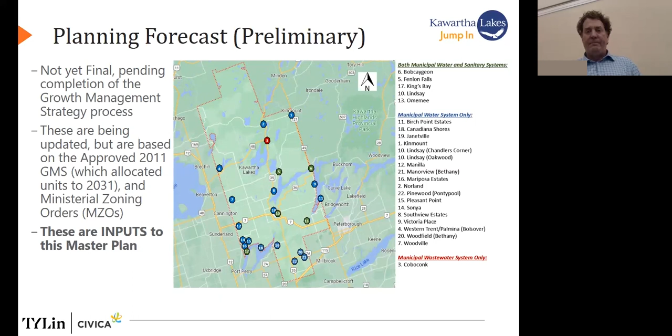I touched on the notion of maintaining the level of service, which is the standard at which the city wants to operate their systems. Development is going to lead to increased water demands and increase the flow into the sanitary sewer systems. That may ultimately lead to us exceeding the capacity of the water treatment plants or wastewater treatment plants, and it may also lead to exceeding the capacity of individual pipes or pumping stations. The objective of this master plan is to study the impacts of that growth and identify required solutions to maintain the level of service.

We don't want development in one part of town to result in low pressures in another part of town. To that end, for water treatment plants, we want to ensure the water supply needs can be provided. Typically you start planning your treatment plant upgrades when the actual demands through the plant reach 80% of the capacity of that plant. Once you start hitting 80% consistently, you need to start looking forward and planning for growth.

System pressures: the city tries to deliver pressure to all residents and businesses between 350 and 550 kPa, or 50 to 80 psi. That's the range we want to try and keep everybody in. When growth occurs, your house could be at 75 now, and if it drops to 55, you're still in the range, but that's still a pretty significant drop. We're going to try to ensure there aren't major changes in the level of servicing.

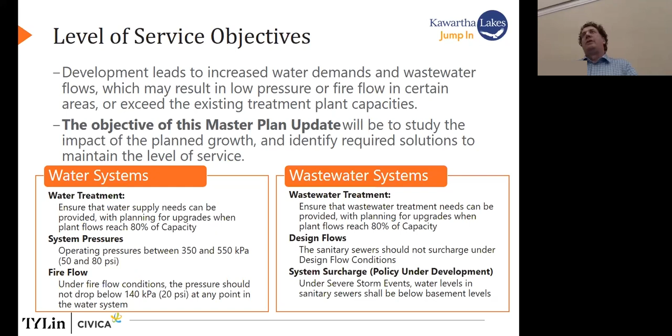So that's the objective - I'm not expecting people to read this slide. This is the Municipal Engineers Association class environmental assessment process. Anytime public funds are spent on upgrading public infrastructure, we have to go through this process to ensure we've consulted, analyzed a whole bunch of alternative solutions, and factored in the natural environment, the socio-cultural environment, the financial aspects of projects and the like. It's a detailed and transparent process. At the end, we'll document all the steps we've taken and the results of the analysis, and share it in a publicly accessible project file report at the end of this process.

We're not at the end of this process right now.

We're actually in the early stages of it. We're approaching the end of phase one, where we're identifying the problem statement. We're going to collect feedback from interested stakeholders, and then do a more detailed dive into the infrastructure needs to support the full build out of the neighborhoods and communities, and come up with solutions that, at the end of the day, when we present the alternative solutions, ideally anybody from the public who picks up the document and flips through it should understand the basis for why we came up with those solutions. In a perfect world, they'll say, you know what, based on the alternatives that were available, it does seem like the most reasonable approach.

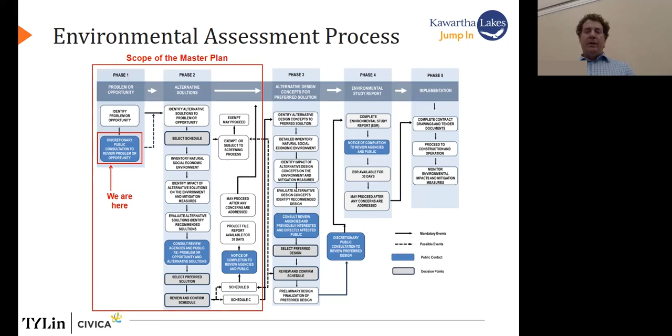Now I'm going to get into a couple of slides that indicate the sorts of impacts that the growth pressures we anticipate, based on the current status of the GMS, may have. Again, it's not 100% finalized, but looking at these numbers gives us an idea as to which systems may become stressed by the growth. I don't want you to focus too much on the numbers. Of course, if I didn't want you to focus on the numbers, why'd I put them up?

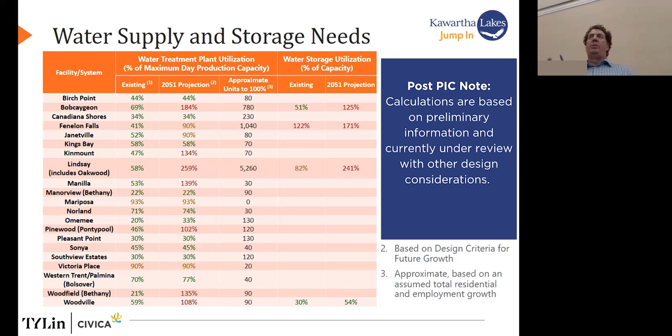But these numbers are not yet final. These numbers assume, okay, so two things. I'm going to go through this column by column. Obviously we've got all the facilities—this is water supply and storage, so water systems only. On the left we've got all of the various facilities, all the various systems owned and operated by the City of Kawartha Lakes.

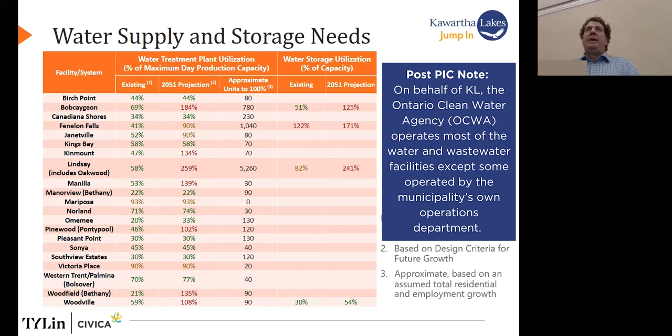The existing column is what percentage of the maximum day water treatment capacity is being used today, based on the last 5 years of data. So if we just pick Fenelon Falls, for example, it currently is operating at about 41% of the plant's rated capacity. That's what the Ministry of Environment, Conservation and Parks has approved that facility to be able to handle.

That's what it was designed to be able to handle. It's entirely possible that there may be some processes that have aged and you maybe can't get the full capacity of the facility through it. There could be some hydraulic bottlenecks that have developed over the years. This doesn't factor that in—this factors in the approved operational capacity of the facility.

So Fenelon Falls, based on the existing community, the existing service area, is running at about 41%. When we add in all the growth that's anticipated or forecasted for Fenelon Falls at this time, it will take us to about 90% capacity by 2051. That puts us above that 80% threshold that I talked about earlier. So the city really needs to start thinking about upgrades to that facility, but it's not at 100% capacity.

The other note, note number 2, is it's based on the design criteria for future growth. So there's a design criteria, which is how much water you assume every resident uses, or that every square meter of employment land uses. Those numbers are generally conservative, and if we look at historical usage, they're generally lower than the design criteria. So as growth continues, that growth will probably end up using a real amount of water that is lower than the design criteria amount.

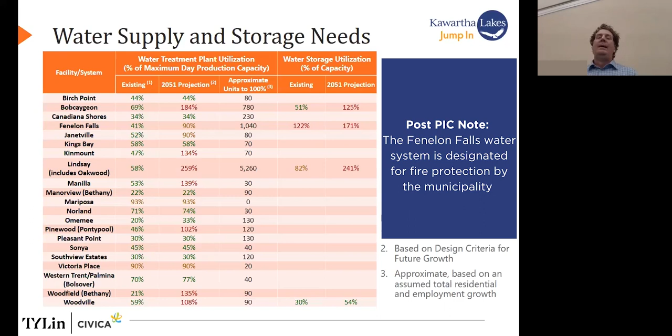So anyway, the point is that we're going to continue to look at these numbers and establish if and when upgrades are going to be needed. So the main takeaway here: upgrades to some water treatment plants and storage facilities will need to be considered in order to support the planned growth to 2051.

If a facility is projected to be, say, 5% over its design capacity, maybe it isn't warranted to upgrade the facility. These are the sorts of things we need to consider.

There's a number of alternatives we're going to look at. One of them is do nothing, understanding there's a risk the facility won't have enough capacity to produce the water. But knowing the design criteria, maybe the city accepts that risk. Maybe you limit community growth. So instead of 1,000 units of forecasted growth, which would push us 5% over and trigger a $5 million upgrade - I'm just making numbers up - maybe it makes more sense to cap growth 20 units short of what's anticipated, and avoid a $5 million capital investment in the plant.

These are the sorts of things we're going to be evaluating and discussing, and then we're going to bring back to you at the next Public Information Centre.

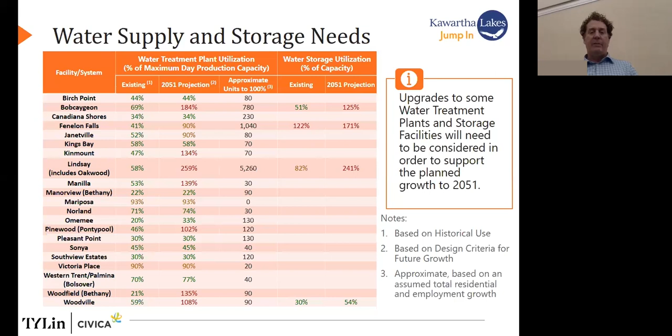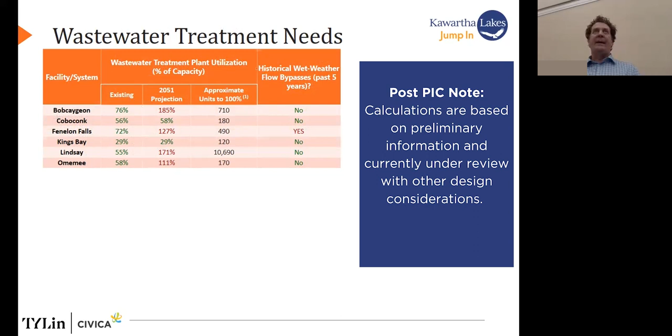We've done a similar analysis for the wastewater treatment needs. Same idea as before: what are the existing flows to the treatment plants relative to the plant's capacity? And if we allow the growth to occur, if we connect everybody, if all of the growth planned for these communities connects to the treatment facilities, that's what it'll come to.

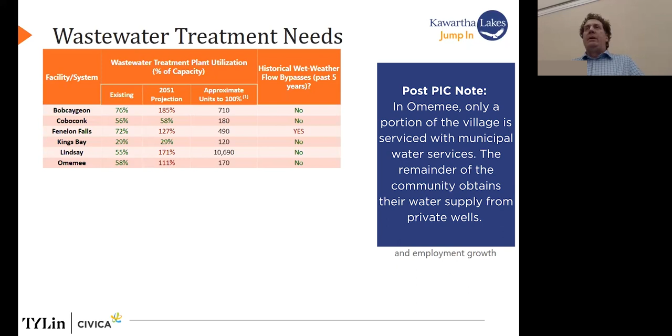Sorry, one important point I missed on the last slide. Growth within urban centers - and for Kawartha Lakes that's Lindsay, Bobcaygeon, Fenelon Falls, and Omemee - is supposed to be serviced by both municipal water and municipal sewers. In the hamlet areas, which cover the other systems, you've got the potential to have municipal sewer servicing but be serviced by private wells, or vice versa.

So when we talk about the growth that could occur in some of these communities, these numbers present what would result at the existing treatment plants if all of that planned growth ends up connecting to the networks. They may not have to all connect. So when we come back at the next PIC, you may see that some of these 2051 percentages have gone down a little, because we're going to look at the servicing plans for these communities in greater detail and the feasibility of connecting. So these numbers may change between now and when we come back - that's part of the deeper dive we'll do.

All right, I've got about 3 slides left. Those last two slides dealt with the water and wastewater treatment plants and water storage, based on the growth we're anticipating to meet provincial growth objectives and forecasts.

What we're also going to do, as the city completes its separate growth management strategy process, is identify more precisely where in Fenelon Falls or Lindsay some of this growth is going to occur. That will allow us to analyze the impact on specific sections of the water main network, the sanitary sewer network, or the sewage pumping stations - there's a number of those. So we'll be able to look at more local aspects at a neighborhood level, whereas with the plants we're looking at the entire system.

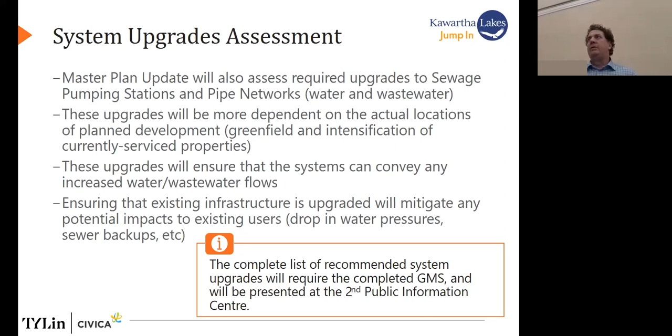So, the next steps. From an infrastructure planning perspective, we're going to focus on two main scenarios. One is the baseline, or existing conditions—are there existing bottlenecks in some of these systems based on the existing communities and populations? It's important to understand this, because when we look at the future growth and build-out scenario, we're going to identify where problems occur or could occur as a result of growth. Typically, development will pay for the upgrades required to service that development.

If there are existing bottlenecks in the system, it's two things. One, some of the costs of the upgrades may not be funded entirely from growth. We may also look at opportunities—if we know, for example, in a water main system there are low pressures in a certain area, you need a bigger pipe coming into that area. Maybe we can do it on this street, maybe on that street. Oh, that street's already undersized—well, let's build the bigger water main there. We'll address two issues at the same time.

Sometimes we know that if there's two different options—well, the sewer on one street was replaced 10 years ago, the sewer on the other street is 60 years old. So if there's an option of going one way or the other, let's replace the 60-year-old pipe instead of the 10-year-old pipe. Those sorts of things.

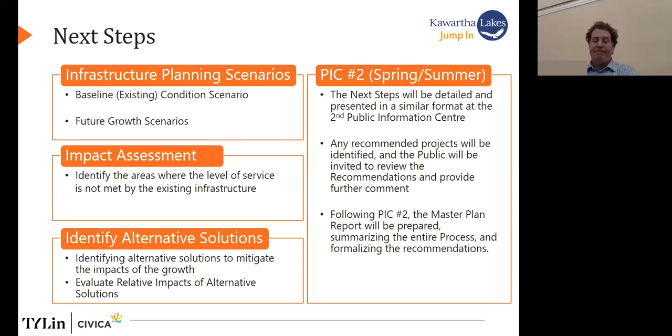But that's about it. We're in the early stages of this Class Environmental Assessment process. We're defining what the problem is, and then we're going to work at identifying what the alternative solutions need to be. We do value your feedback—we've received some already, and we're hoping to continue to receive more.

If you have any questions, if you're in the room today, I'm right on about my 30-minute estimate. I'll be here, and staff will be around for the next half hour or so. We'll engage in one-on-ones. If you're online, I don't know if there have been many questions come through. No questions. Is the mic working?

Did I do that good of a job? I don't know, maybe I put everybody to sleep. And hey, you don't have to have a question right now. You're not on the spot. You got 30 minutes, go.

If something comes to you tonight, tomorrow while you're having a shower and the water pressure is really low, what the heck's going on? If something comes to you, listen, we'd like to get comments and questions in a timely manner.

We've established the date of October 28th. There are comment forms available in the room. For those of you online, comment forms will be uploaded to the website as well, so you'll be able to fill one out and submit it. We accept positive comments as well as negative comments or concerns. Please try and get them to us by about the end of October.

We're going to bring all these comments in and summarize them. If there are some common comments or questions that come up, we'll likely post them in a frequently asked questions section of the website, so people can see what others have been asking. There's no sense in us keeping that quiet. The more information we put out there, the better the engagement is, and the more feedback we're going to get. So the website is there.

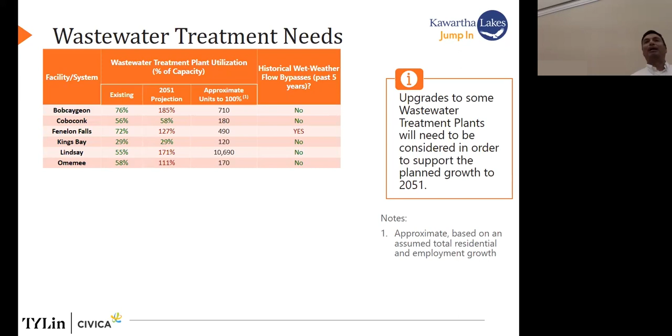Sorry, Kevin, you wanted to add on? Feel free. Well, the only thing I've got to add is I'm not even 50 years old and my joints crack already too. So thanks, Juan.

There's also a question regarding Fenelon Falls and the historical wet weather flow bypasses there, and what's being done. So as part of the master plan, we've gone in and walked through the facility. We've done a condition assessment. We're looking into whether the plant is generally in good condition. The plant operators do tend to try to report on why bypasses were triggered.

Again, Fenelon Falls, we're seeing about 72% of the plant capacity, so it is getting up there. Obviously, the greater you are with respect to your average day capacity, the more impactful high wet weather flows can be. So it will be looked at as part of this study. It may require a more specific study than what this study is going to address. But the city is aware of the issues and is interested.

I hope I'm not putting words in your mouth. I'm sure I'm not. You're interested in trying to find a solution. And Juan is nodding, so yes. I can't say much more than that right now. Hopefully, at the next PIC, I'll be able to provide a more complete answer.

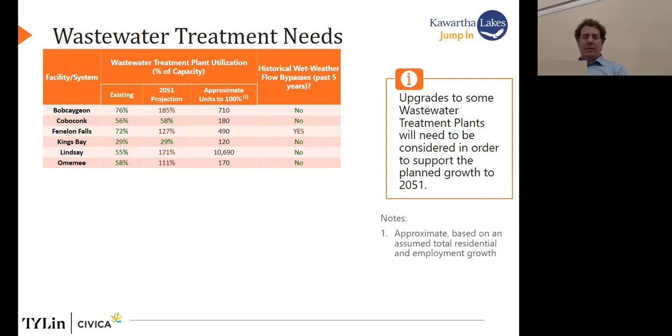In regards to the water treatment, they only test for bacteria. Why is that? This is potable water being supplied to people in Lindsay and all the other systems online. Why do they only test for bacteria in the water and not all the other agents that are in there? I am not a water treatment process expert, so I'm not able to answer. Sorry, the question is, why do they only test for bacteria for the water leaving the water system and entering the distribution system, which is connected to homes?

So I unfortunately can't answer that, but Juan has flagged me again. I don't know why you didn't just stay up here the whole time. So thanks, Kevin. Again, that's a good question.

We're not the experts on processing. That's with, so we have two operating authorities for water and wastewater: Water Wastewater Operations as part of Public Works, and OCWA, the Ontario Clean Water Agency, that runs some of our plants. So we have two separate authorities that run various water wastewater systems within Kawartha Lakes. Regardless of operating authority, they have to report annually for all the plants in accordance with the MECP Certificate of Approval. So I can't comment on what they test for specifically, but I can say we test in compliance with the provincial regulation of MECP, and those are all posted on the website. So whether we test for bacterial counts or other things, I don't know, but that information is relatively available on our website, and it's in accordance with MECP.